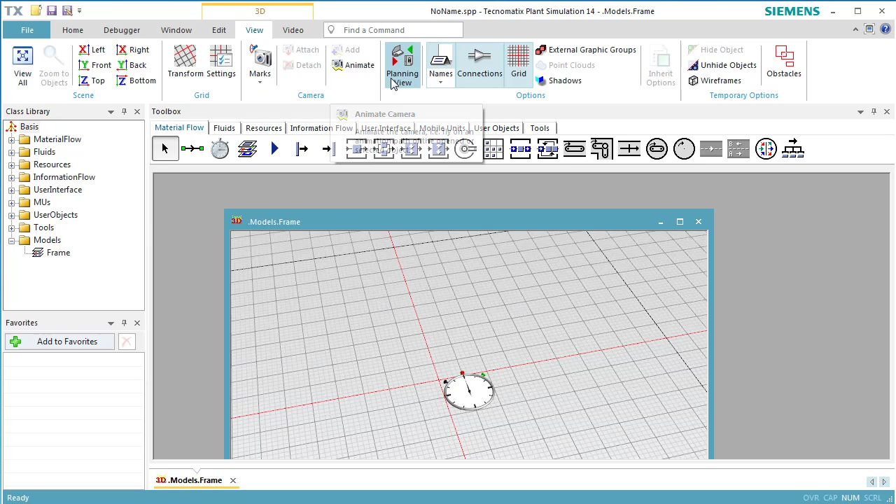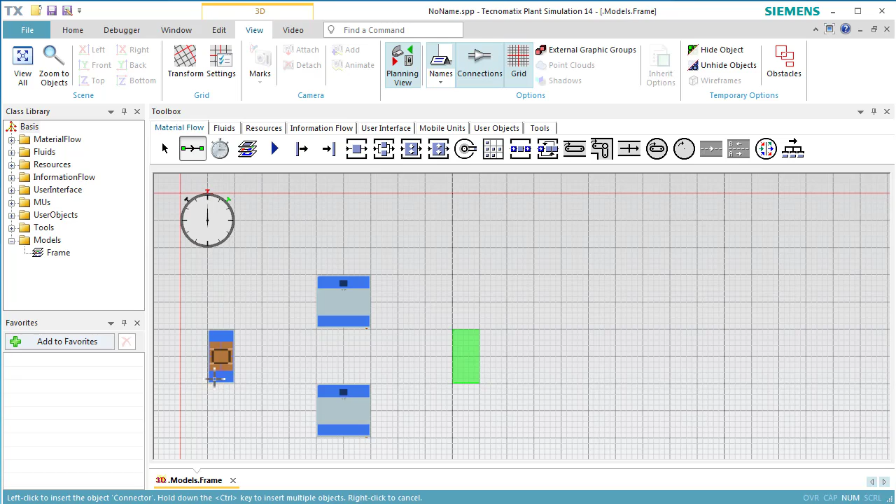To do so, we create a model with a source, two stations representing the main machine and the auxiliary machine, and a drain. The main machine should be the first successor of the source. First, we connect the source and the main machine, and then the source and the auxiliary machine. You can insert the two connections from the two machines to the drain in any order you like.

Then, we open the source to configure it. We want it to produce one part every minute. We click the tab Exit of the source and select the Exit strategy Start at Successor 1.

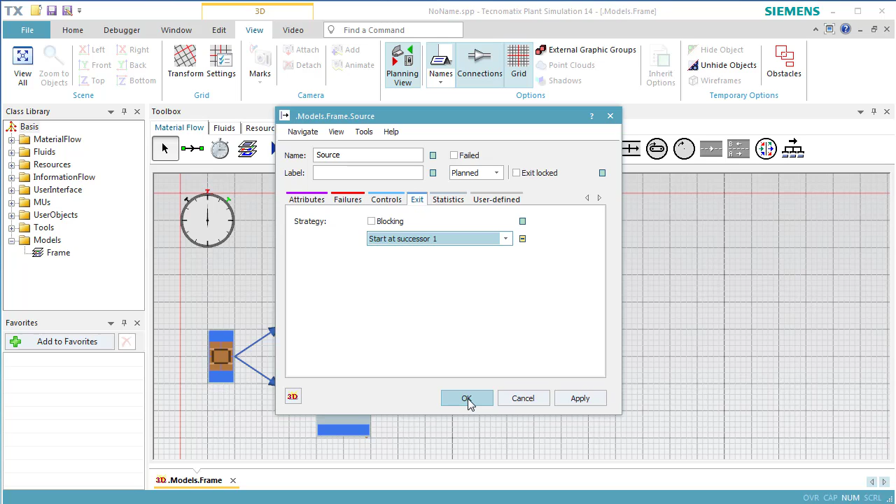We want to simulate interruptions of the main machine caused by failures. To do so, we add a new failure profile by clicking New on the tab Failures. We accept the default availability of 95% and the MTTR of 1 minute. MTTR stands for Mean Time to Repair.

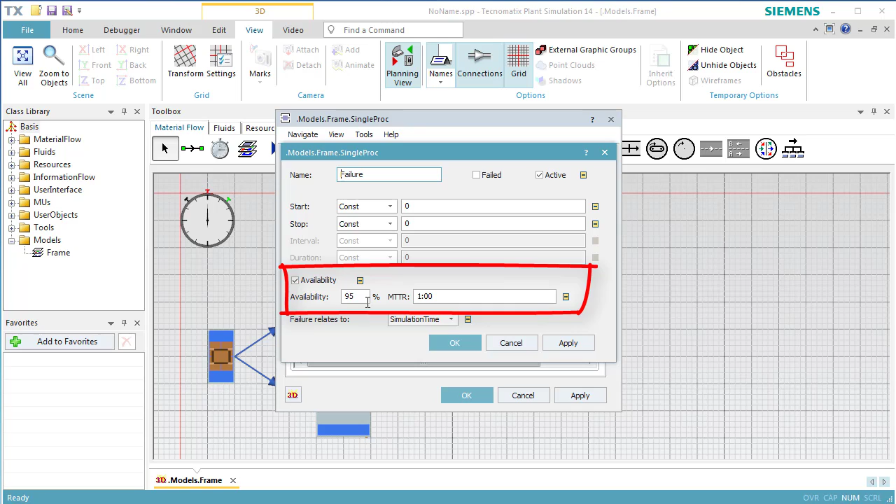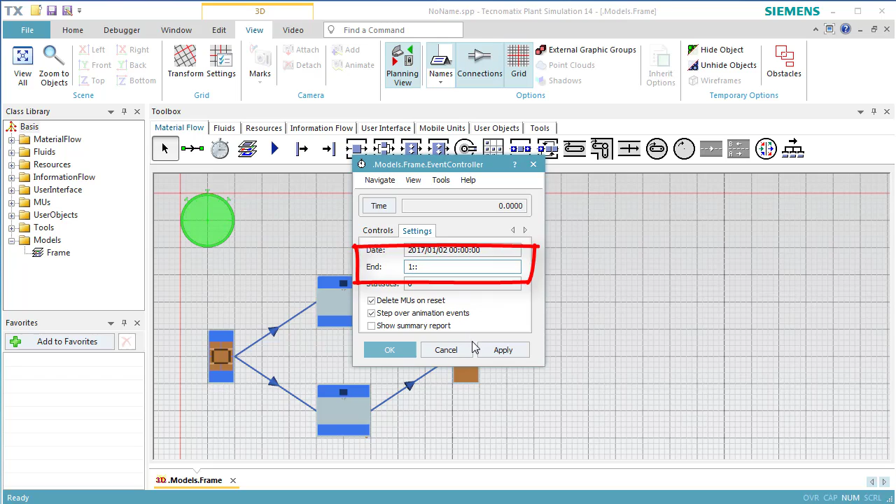As we want to run experiments with the Experiment Manager, we need the simulation to end after a certain time. To enter it, open the dialog of the event controller. Check the tab Settings and type a termination time of 1 hour, entered as 1:: in the text box End of the event controller. Plant simulation will automatically expand the time to 1 hour. Click OK to close the dialog.

This model is suitable for the intended experiment study.

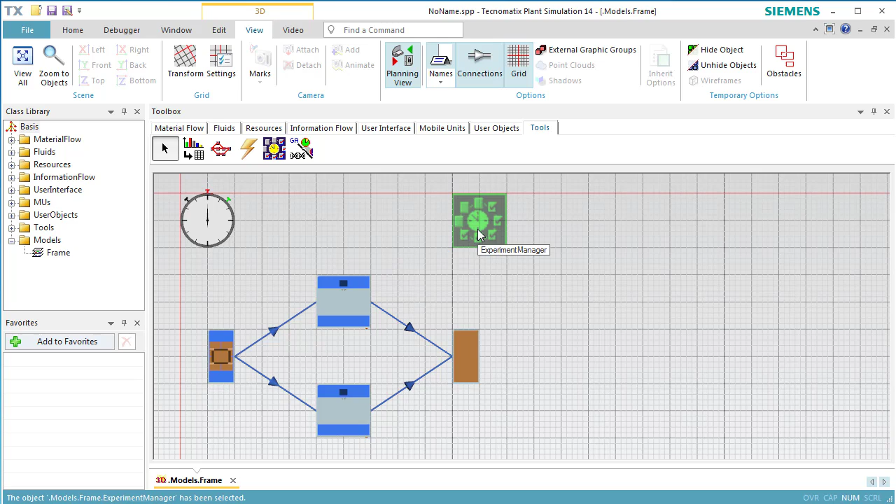Finally, we add the Experiment Manager to our simulation model. You will find the Experiment Manager on the tab Tools in the toolbox. Open it and configure the experiment.

We first specify the output values as the target of the simulation study. To do so, we click Define Output Values on the tab Definition.

Drag the auxiliary machine to the first row of the table and drop it there. Then, we extend the name with the statistic value we are interested in, stat, working portion, in our case. It's helpful to enter a description of the value, for instance, utilization of auxiliary machine. We then click Apply to run a plausibility check. It tests whether the entered value exists and is suitable for a statistical evaluation.

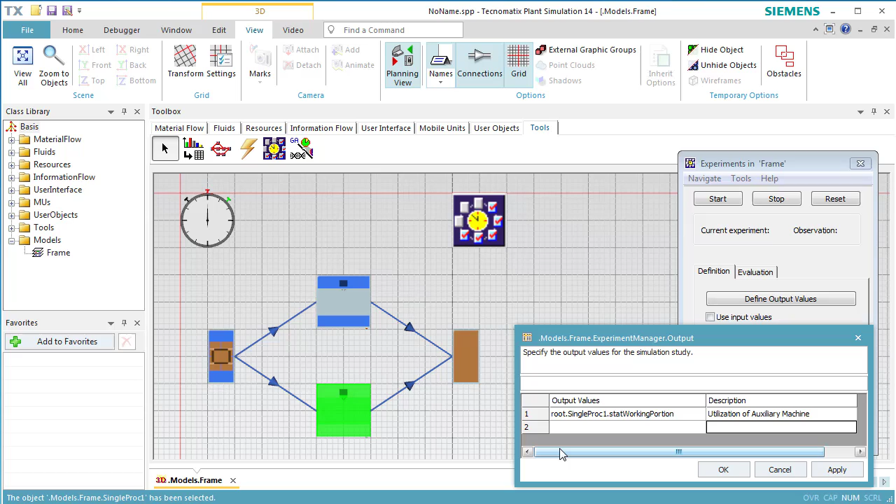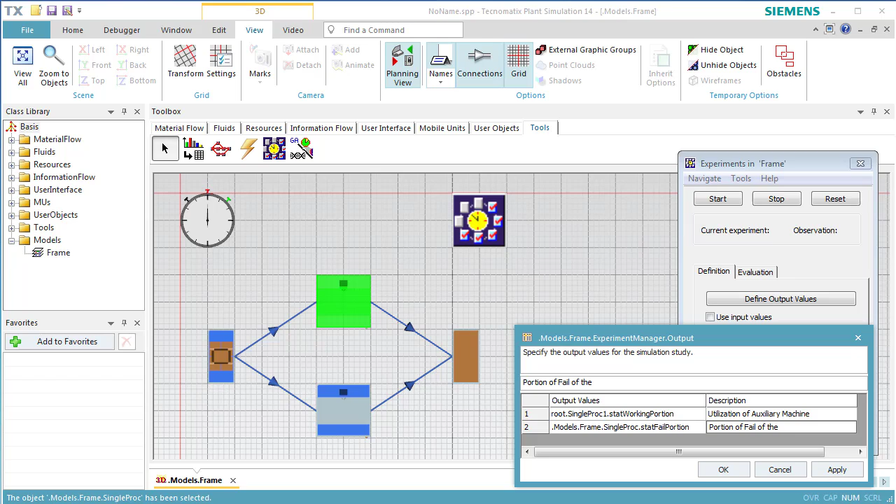To enter a further output value, we click into the table Output and press Enter. We click the main machine and drag it to the second row of the open table. We then place the cursor behind Main Machine, type in a period, and the name of the statistics value that interests us, stat, fail, portion in our case. It's helpful to enter a description of the value. We entered the description, portion of fail time of the main machine. We then click Apply to run a plausibility check and click OK to close the table.

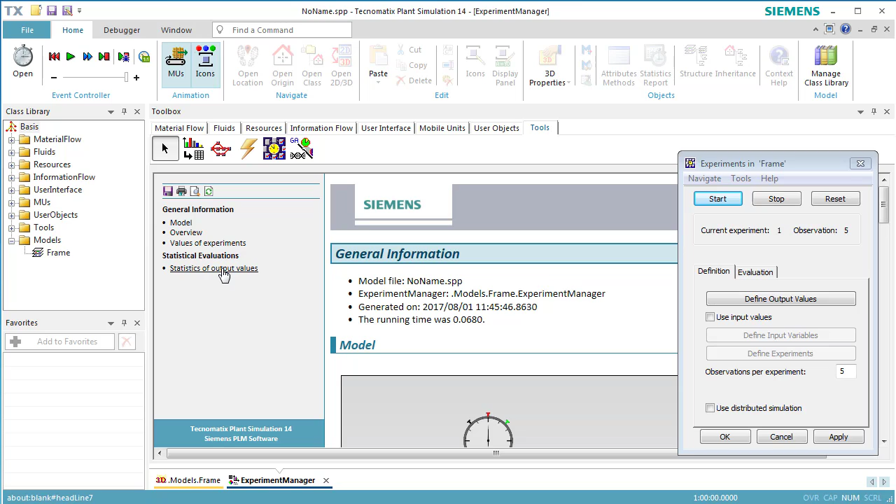Next, we reset and start the experiment run. The Experiment Manager executes 5 simulation runs with different random behaviors caused by the failure we entered. After the experiments are finished, an HTML report will open.

Click the page Statistics of Output Values. The box plot under Evaluations of the Output Value, Utilization of the Auxiliary Machine, visualizes the observed values of the first output value. The box plot visualizes the fluctuations. Minimum and maximum are often considered for a simple evaluation and give intuitive representation of the variance.

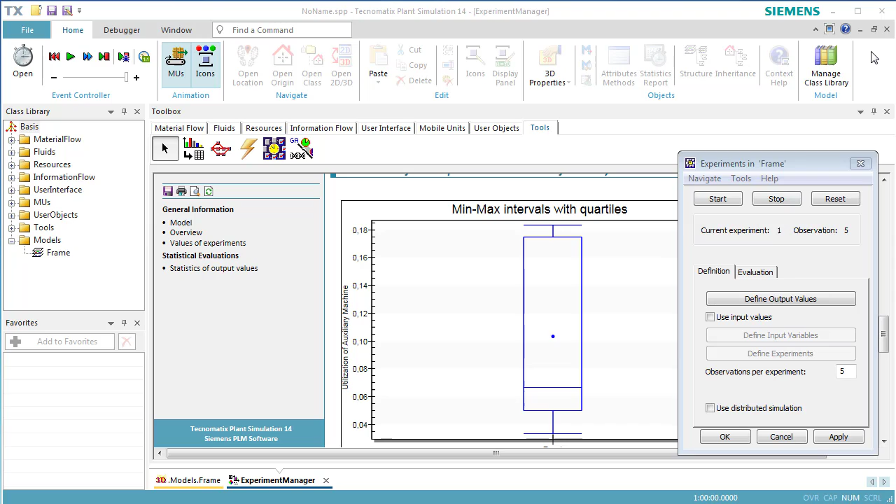A more detailed evaluation is available on tab Evaluation of the Experiment Manager. Click the button Detailed Results to open a table of the numerical results. Typical statistic values of the observed output values, like the mean value and the standard deviation, are shown in numeric form.

The exactness of the mean value is described by the confidence interval. Be aware that one cannot draw conclusions with absolute safety; one can only make statements about a stochastic model with a given confidence level. The confidence level tells us with which probability the true mean value of a measure is located within the confidence interval. The default value of the confidence level of the ExperimentManager is 95%.

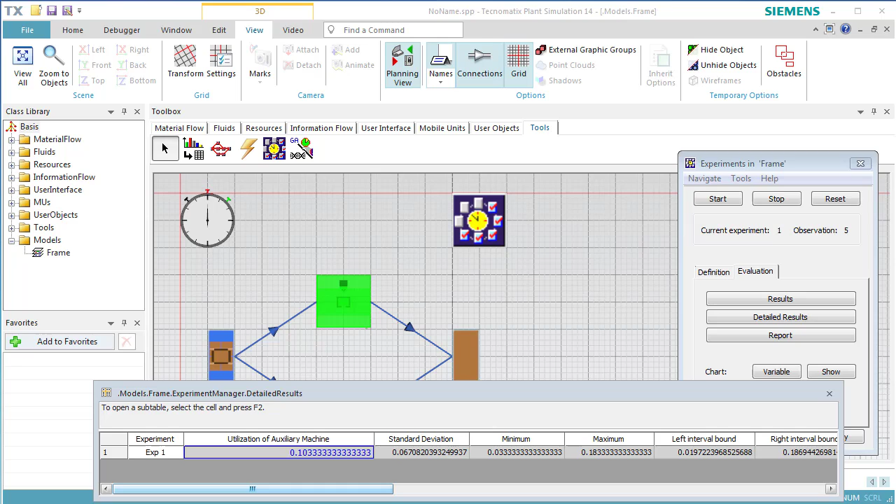After using the ExperimentManager for a statistical analysis, we want to check out how the availability of the machine influences the utilization of the auxiliary machine.

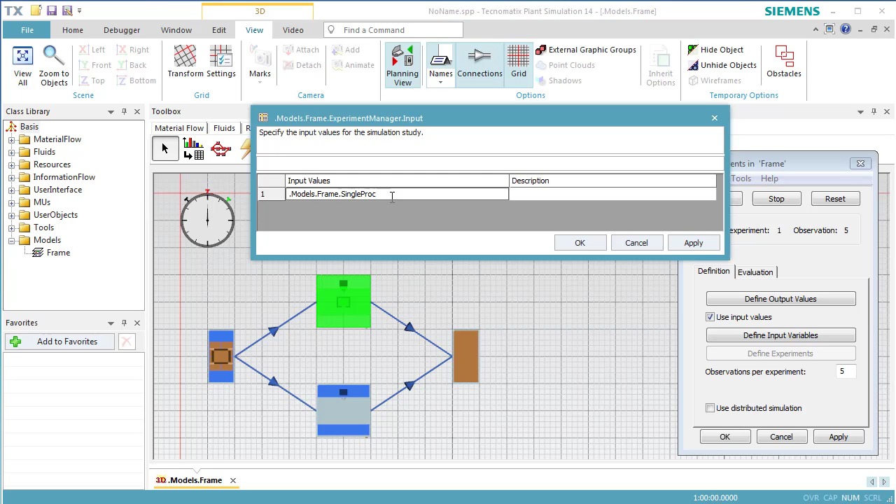We'll change the availability of the main machine. To do so, we define the input value. We select the checkbox Use Input Values and click Define Input Variables. To enter an input value, we drag the main machine to the first line of the table Input and enter a period, followed by Availability.

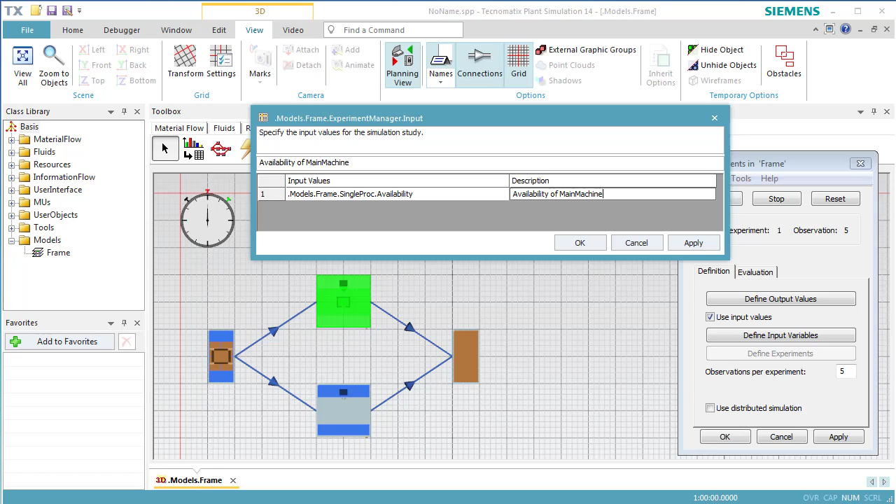This activates the button Define Experiments. We click the button Define Experiments.

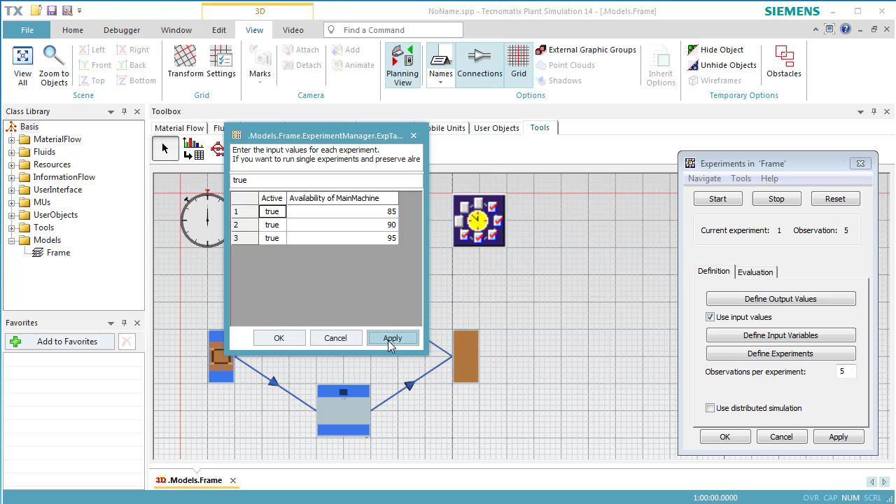In the table which opens, we enter the values 85, 90, and 95 for the percentages of the availability, each in a line of its own in the column. We then click Apply. The first column will be filled with the value true, denoting that this parameter will be used for an experiment. Click OK.

This configures a new experiment study consisting of 3 experiments. Each experiment has 5 simulation runs, or observations.

Now we're ready to execute our second experiment study to check out how the changed availability affects the results of the simulation study. Click the buttons Reset and Start.

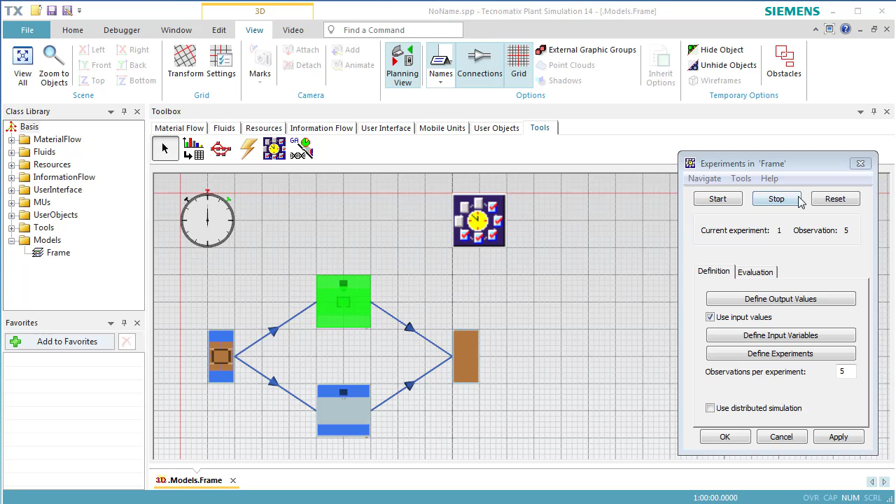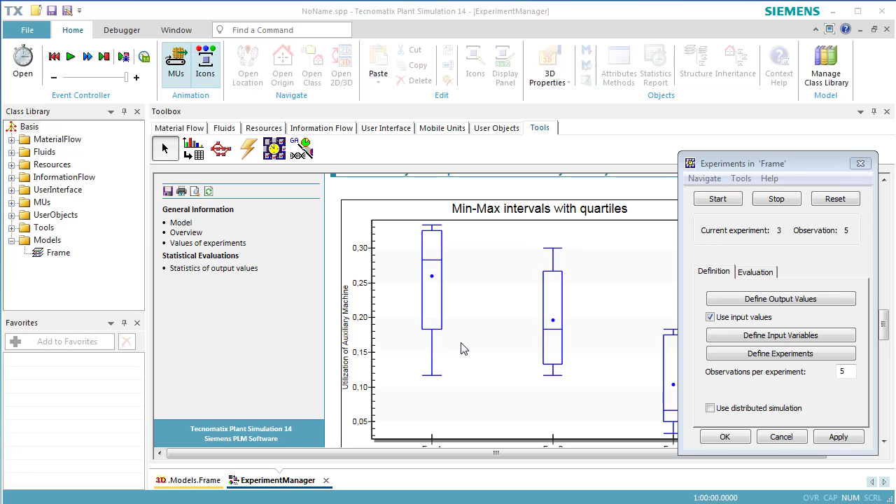The HTML report opens after the experiments are finished. Change to the page Statistics of Output Values. We can view the results of the 3 experiments in one chart on the tab Evaluation.

On the tab Evaluation of the ExperimentManager, we can choose to show min-max intervals or confidence intervals. The chart shows the number of the individual experiments on the x-axis and the observed values of the output values on the y-axis. It shows the expected relationship between the availability of the main machine and the working portion of the auxiliary machine.

We see that increasing the availability of the main machine results in a reduced working portion on the auxiliary machine.

Click the tab Evaluation of the ExperimentManager. Select Confidence. Comparing the confidence intervals shows that this effect is not statistically significant. In other words, the observed differences can be a result of the random behavior of the model. Further studies are needed. You can close the chart.

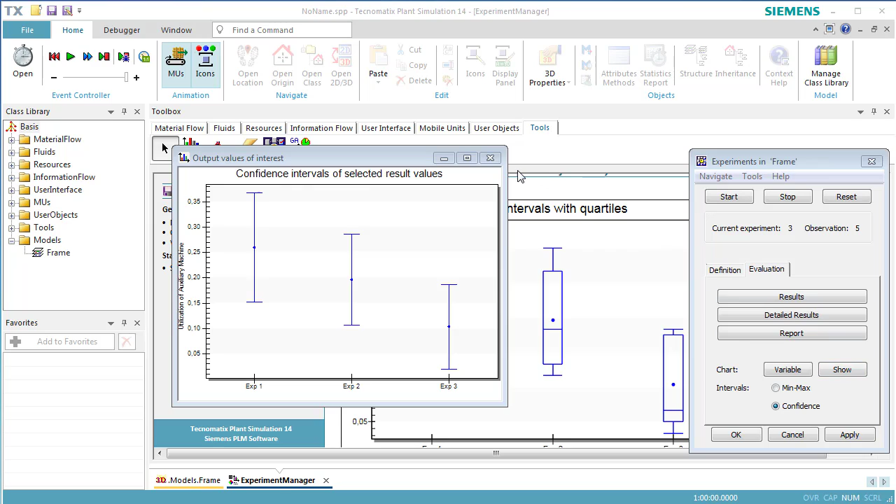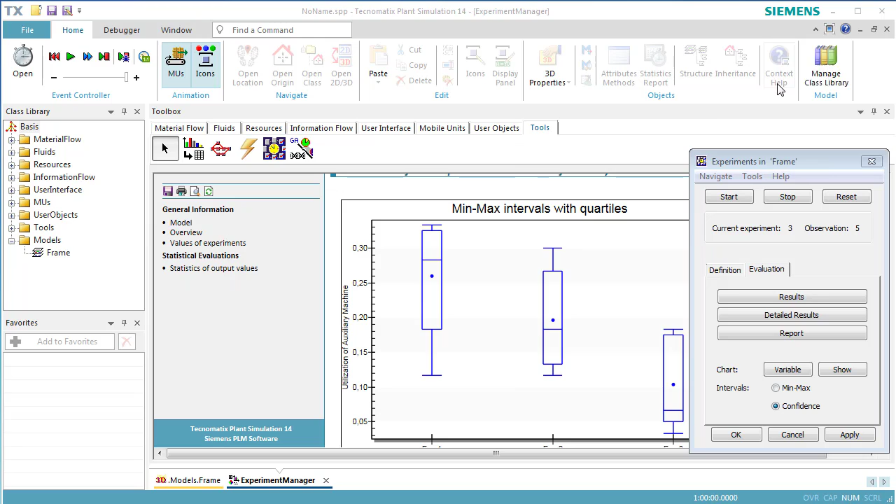To get results with greater reliability, we must perform more observations per experiment. We change to the tab Definition and type in 50 observations per experiment. After the study, we check the width of the confidence intervals.

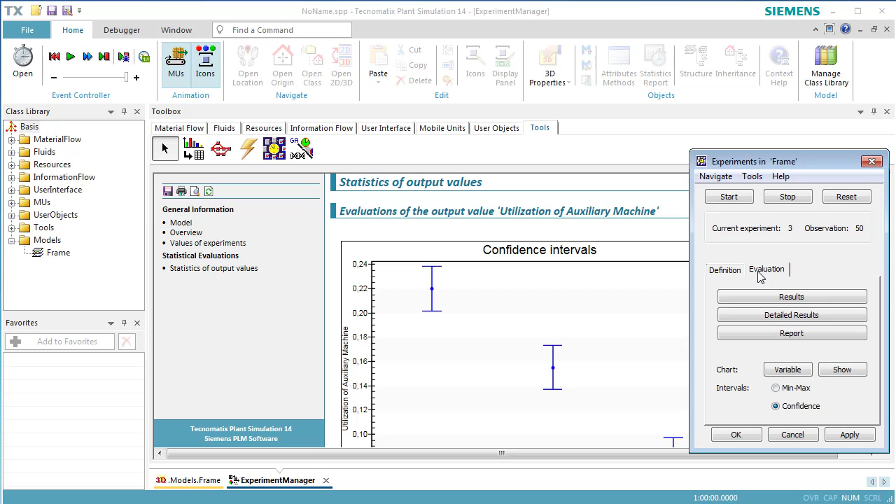Click Reset and Start to run the experiments. After the experiment run is finished, we select the tab Evaluation. Select Min, Max and click Show to open the chart. More observations obviously led to greater min-max intervals.

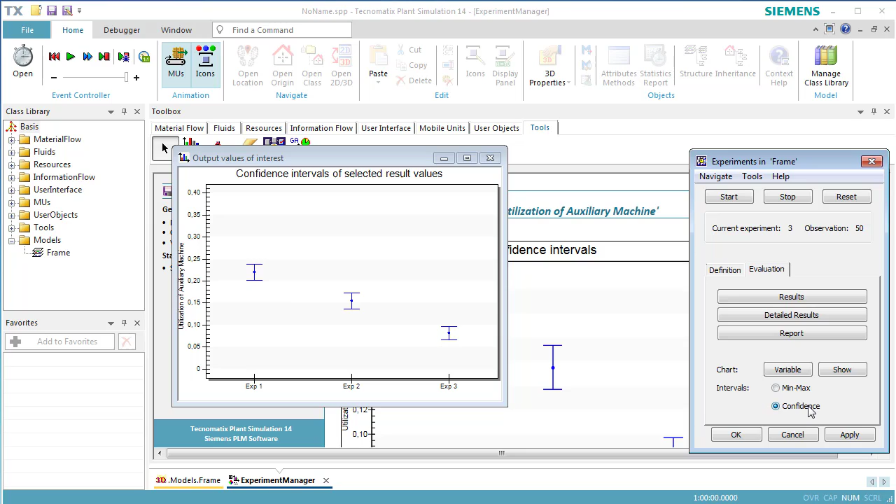We select Confidence and open the chart again. As is well known, more observations led to a reduction of the width of the confidence intervals. We compare the confidence intervals and recognize a significant difference. In our study, these observed differences cannot be a result of the random behavior of the main machine. The differences are significant and based on characteristic properties of the model.

If you have doubts, repeat the study with 500 observations. This concludes the video using the Experiment Manager.